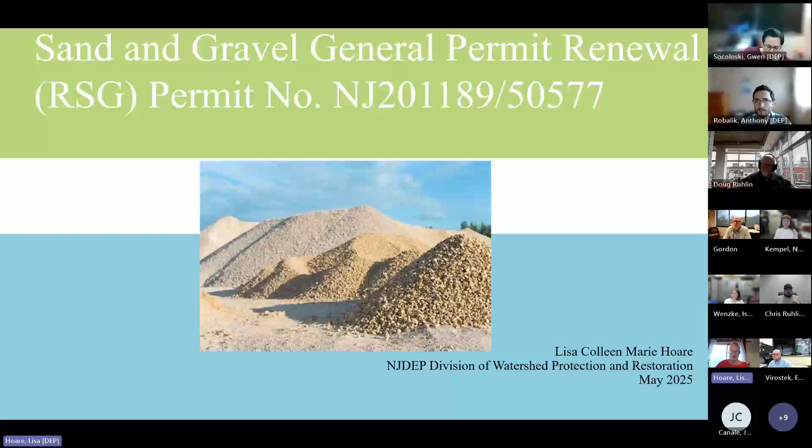Good morning, everyone. My name is Lisa Colleen Marie Hoare, and I work as an environmental specialist in the Industrial Stormwater Permitting Unit and the Bureau of New Jersey's Stormwater Permitting, Division of Watershed Protection and Restoration. This presentation is for the Sand and Gravel General Permit Renewal, or RSG Permit Renewal, that was recently pre-drafted. The presentation will highlight changes and updates that the department has deemed necessary for a comprehensive renewal of the permit. So let's get started.

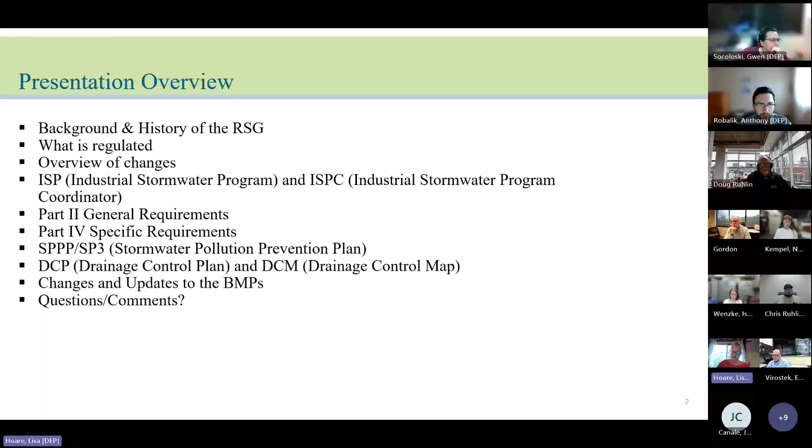Here's an overview of the presentation. This morning we'll start by briefly talking about federal background and history of the RSG permit, as well as what is regulated under the RSG. Then we'll look deeper into the changes and requirements and how it differs from the current expired 2014 Sand and Gravel GP. We'll have a question and answer period at the end of the presentation.

First, let's get into a brief background of the regulations from both the Clean Water Act and EPA and how it shaped our industrial programs in New Jersey. Under the Federal Water Pollution Control Act of 1972, a facility with a stormwater discharge associated with industrial activity must obtain a NPDES permit. However, EPA delegated the authority to implement the Federal Industrial Stormwater Program in New Jersey to the New Jersey Department of Environmental Protection. So the industrial stormwater permits are issued from us.

The precursor to the RSG was the R13, also known as the Mining and Quarrying GP. However, the RSG was created due to demand from facilities that only engage in sand and gravel operations. Additionally, facilities authorized under this permit do not discharge to surface water, so this permit does not contain any stormwater monitoring or limits. The first RSG master permit was issued in 2014 and is being renewed this year.

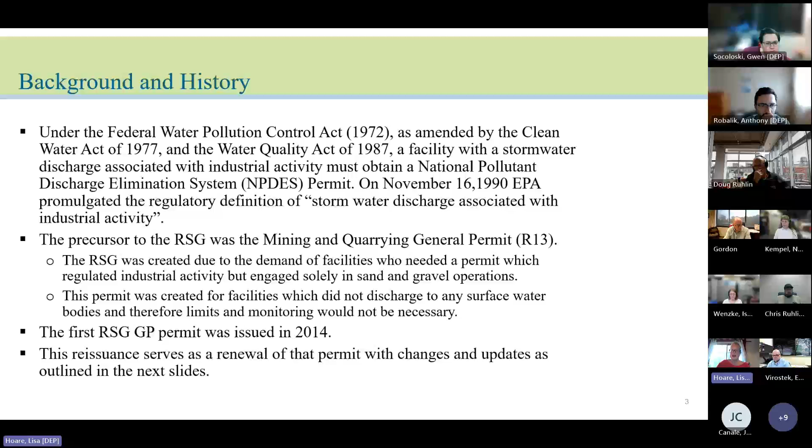The RSG is one of the industry-specific general permits that our program issues, and it regulates industry for sand and gravel production. Sand and gravel production involves removing and processing various grades of rock, turning the stone into different sizes and grades. The key essential element is simple: the processed water cannot be discharged to any surface water bodies.

As a result, we require various plans, including the SPPP and DCP, which we will discuss later, and implementing BMPs to manage the stormwater on site. As a result of these requirements and the limited industry regulated under this permit, limits and monitoring again are not required under this permit. Here are the SIC and NAICS codes regulated under this permit.

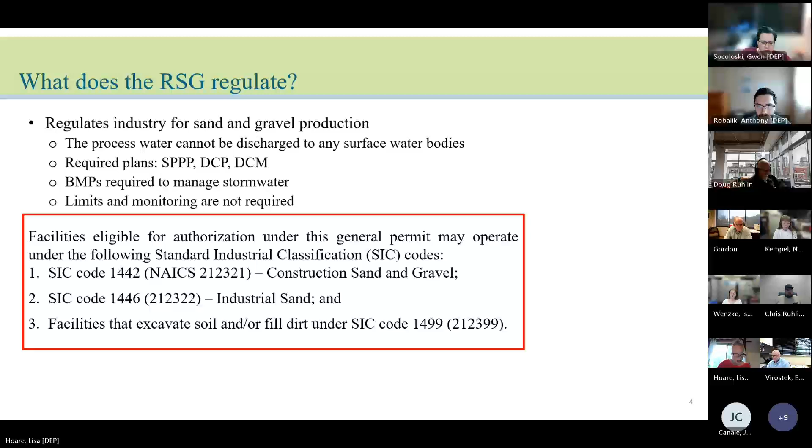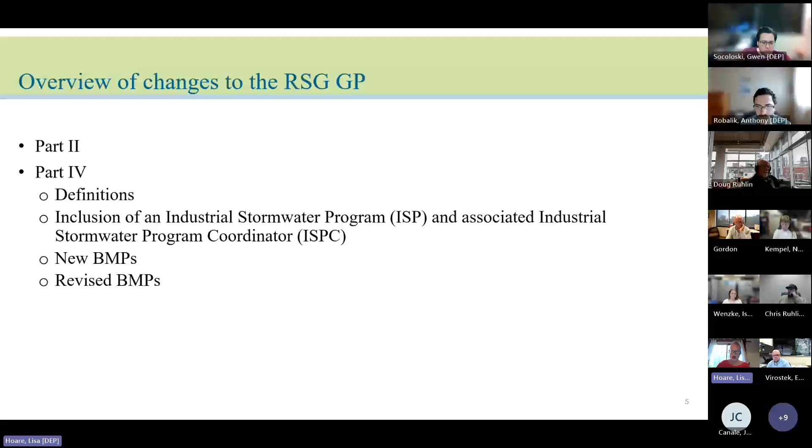Now we'll discuss the changes being introduced to Part 2 and Part 4 of the permit. I will go into each part individually over the next few slides so you're familiar with the proposed changes. Most of the changes occur in Part 4, as well as the BMPs therein.

Let's talk about some new requirements in Part 2 of the permit, which are general requirements. There are several new notifications and updated requirements that have been included. Electronic reporting and requirements for obtaining a 5G3 for new construction that isn't related to the sand and gravel activities have been reworded to be consistent with current requirements and other new general permits. Additionally, reworded requirements in Part 2 include notification for facility changes, notification of changes to the facility permit contacts, access to information, notifications of ownership and/or permittee operator entity, eligibility, authorization, and automatic renewal of the authorization.

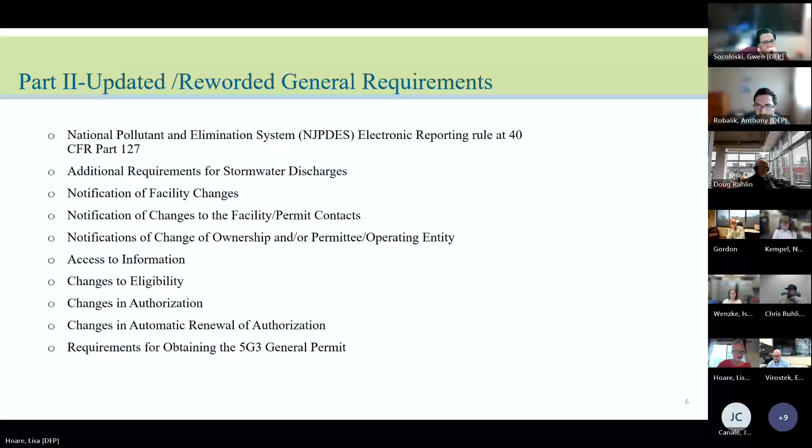First, let's discuss what's included in Part 4 of the permit. There are a couple of new definitions.

Authorized representative means those persons whose presence is in place of the actual entity, person, or department with all rights and responsibilities under NJAC 7:14A-1.2. Bulk liquid means a liquid stored in a fixed in place above ground storage tank, including but not limited to oil, petroleum products, processed wastewater, including leachate, and chemicals.

Next, we'll go over the terms that were included in the 2014 RSG permit but have updated definitions in the renewal. The definition of BMP has been expanded from the previous permit to include a schedule of activities, prohibition of practices, maintenance procedures, and other management practices to prevent or reduce pollution of waters to the state. Containerized source material and non-containerized source material has been updated from source materials, breaking them into two definitions.

Equipment and vehicle are now split into different separate definitions. Stormwater is defined as water resulting from precipitation, including rain or snow, that runs off the land surface, is transmitted to the subsurface, or is captured by the separate storm sewers or other sewage or drainage facilities.

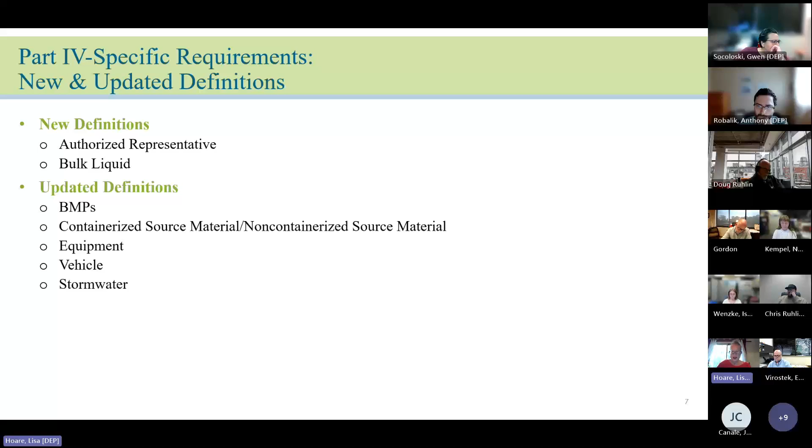There are also several definitions that were removed from the permit as they are no longer used in the updated requirements of the permit.

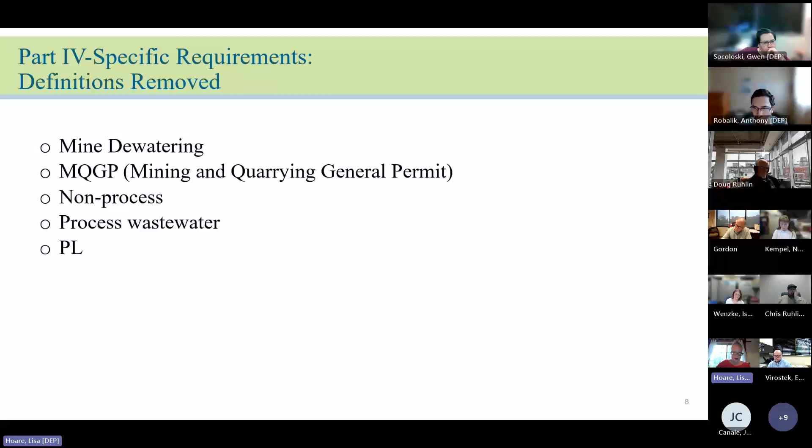So now we'll take a closer look at Part 4 narrative requirements. First, the establishment of an ISP and an ISPC.

The department is introducing new requirements for developing, updating, and implementing an industrial stormwater program, also known as an ISP. The objective of the program is to implement BMPs to reduce the discharge of pollutants. The ISP shall designate a responsible party for that program, known as the Industrial Stormwater Program Coordinator, or ISPC.

The role of the ISPC is to prepare and maintain a current and complete SPPP, as well as complete, sign, and submit the annual report, train employees and contractors on the site, and lastly, be the point of contact for the department.

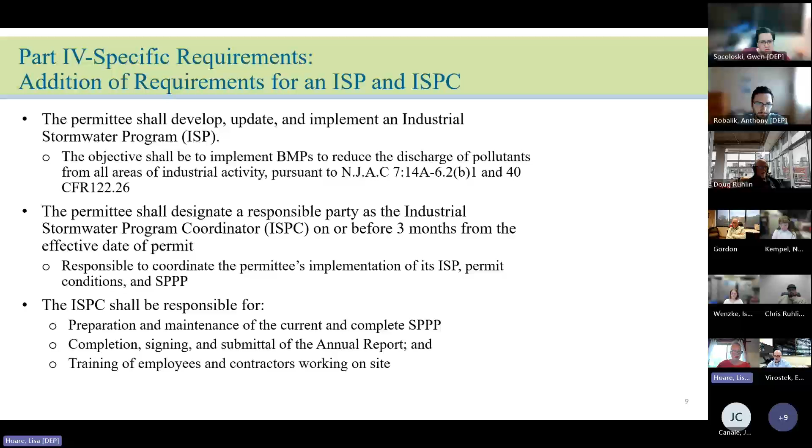Here are the remaining Part 4 requirements, which we will discuss over the next few slides. We have updated and expanded conditions for the SP3, or Stormwater Pollution Prevention Plan, the DCP, or Drainage Control Plan, and the DCM, also known as the Drainage Control Map. After that, we'll go over the updated BMPs included in Part 4.

To be clear, the permittee is already required to have an SP3 and DCP, including a map. These are updated requirements that need to be incorporated into the current SP3 and DCP.

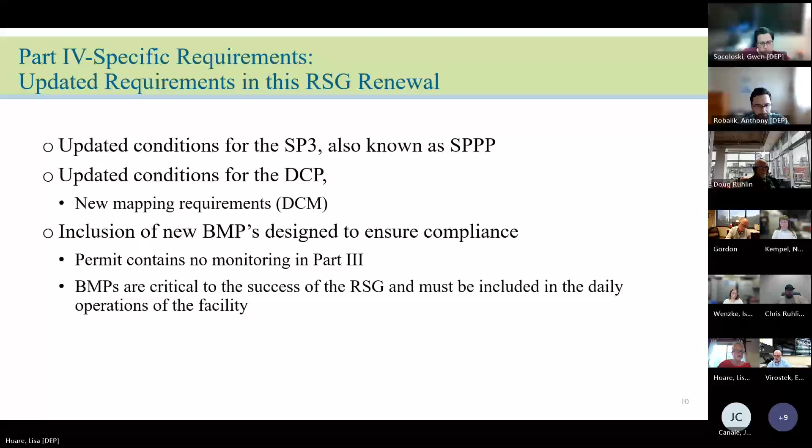Listed here on the slide are the SP3, or Stormwater Pollution Prevention Plan requirements. In the SP3, the permittee must describe the measures necessary for compliance with all permit conditions for all stormwater discharges associated with any source materials.

Inclusion of a current inventory of all source materials must be provided, in addition to thorough descriptions of all industrial activities occurring at the facility and their associated locations. The SP3 must include a drainage control plan and follow all record-keeping requirements.

Note: preparation and submission of the new and updated SP3 must be done within 6 months of the effective date of the permit and implemented within 12 months from department approval.

If there are deficiencies, the permittee must amend the SP3 within 60 days after receiving notification from the department. Lastly, the permittee shall review the SP3 at least once a year and update as often as necessary.

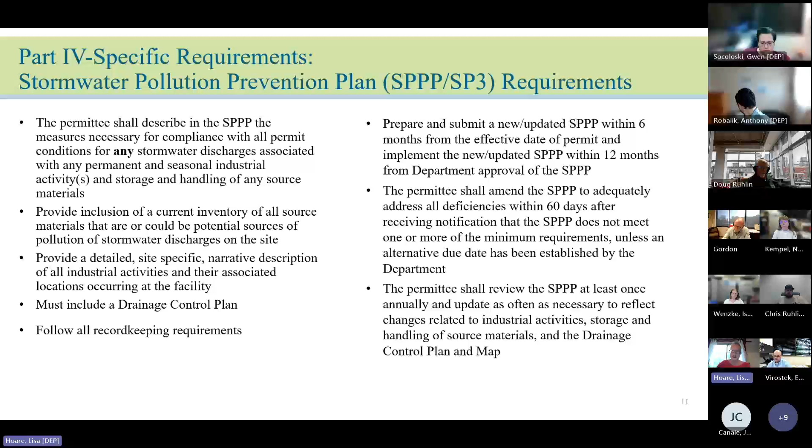Listed here on this slide are the Drainage Control and Drainage Control Plan, or DCP requirements. First, the permittee must establish and maintain drainage control at the facility to ensure that all stormwater associated with industrial activity remains on site and is prioritized to be used for dust control.

If structural practices are needed to achieve drainage control, the permittee shall design and implement structural stormwater management BMPs in accordance with either the New Jersey Stormwater Best Management Practices Manual or propose an alternate design approved by the department. However, all BMPs shall be designed to treat all industrial stormwater at the facility, not only the water quality design storm.

Also, the permittee shall ensure that discharges to borrow pits that have intersected the groundwater table shall only be for process area return water or incidental overland flow in the area around the borrow pits.

Lastly, for drainage control, the permittee shall prevent overland flow of industrial stormwater onto adjacent properties through the use of BMPs such as berms, basins, and site grading.

And all this information should be contained in the DCP. The DCP is made up of two parts: a drainage control map, DCM, which we will discuss on the next slide, and a written narrative section.

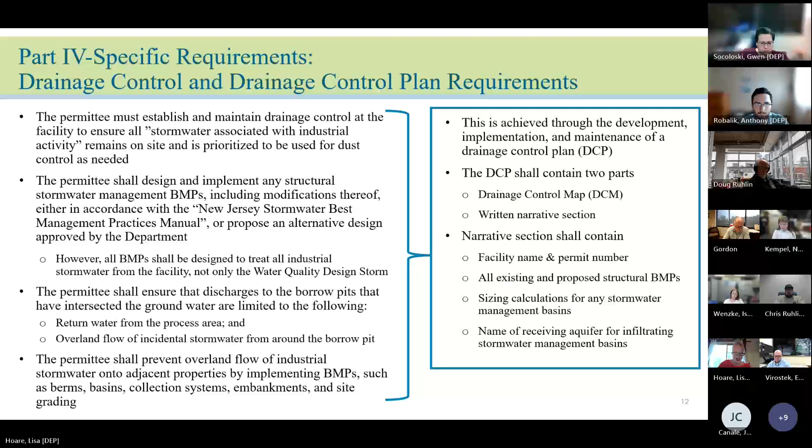Next, we'll take a closer look at the Drainage Control Map, DCM, which is part of the Drainage Control Plan. At a minimum, the DCM needs to include site boundaries, lot and block info, site topography and elevation, north directional arrow, boundary lines of each industrial activity area and source material area, current and proposed drainage area, grading with flow directions indicated, adjacent surface waters, receiving aquifers, existing structure locations such as buildings, roads, and parking, and finally any groundwater contamination, if present. The map should also indicate the dates for initial preparation, as well as any revisions.

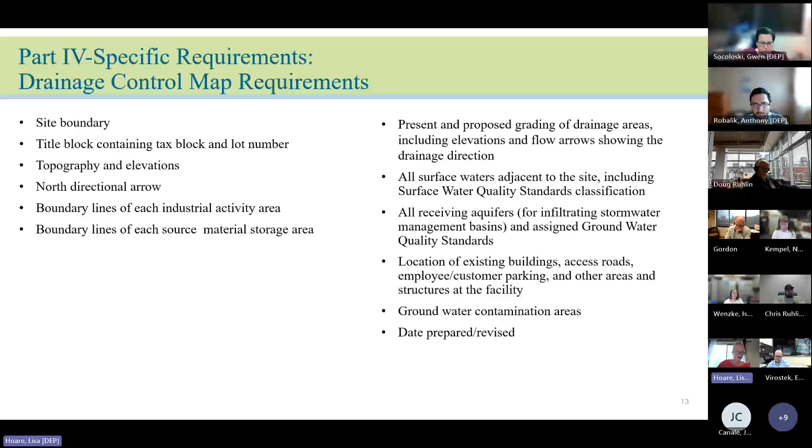Next, we'll move on to discussing the BMPs, or best management practices, that are included in Part 4 of the RSG permit. The 2014 RSG permit included only these first four BMPs shown here in Part 4C, which was for specific best management practices. These BMPs were primarily focused on storage of wood chips and tree debris, salt storage, sediment transport, dust control, and preventing the discharge of oil and grease.

There were additional BMPs for fueling, vehicle maintenance, spill response, and discharge of stormwater for secondary containment, included in Attachment A of the 2014 RSG.

Under the 2025 RSG, we removed Attachment A and listed all BMPs under Part 4D, along with renaming some of the BMPs that were included under the 2014 RSG permit. This was done to increase the clarity of the permit requirements and for alignment with language in our other permits. The department believes that the clarification of previously included BMPs and the addition of some of the new BMPs you see listed here will result in a more successful RSG implementation.

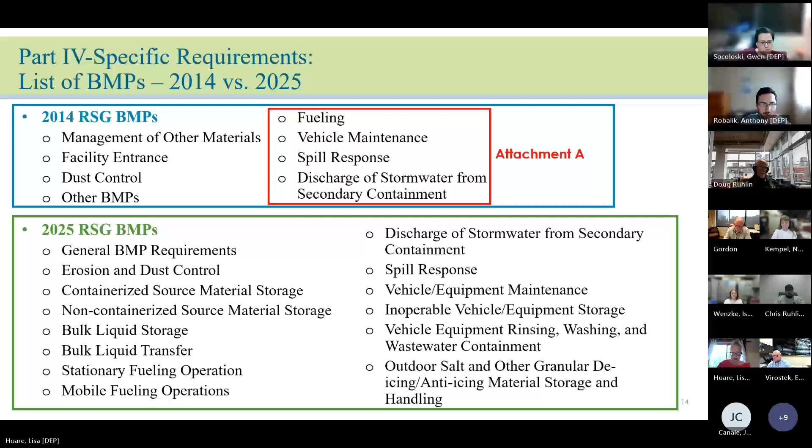So now we'll go into a little bit more depth on the BMPs included in Part 4D of the 2025 RSG renewal. On this slide and the following slides, each of the BMPs from Part 4 will be noted with some of the associated major requirements bulleted underneath. However, please refer to Part 4D of the permit for an extensive list of the requirements.

First, there are some general requirements. This is primarily concerned with how and where source material shall be stored, as well as other general stormwater discharge requirements. Next, erosion and dust control establishes BMPs for site stabilization and dust control, such as traffic control in non-stabilized areas, entrance and exit stabilization, and reuse of collected stormwater to minimize dust and sediment transport. The requirement to sweep or clean impervious areas as frequently as necessary is also included on the erosion and dust control BMP.

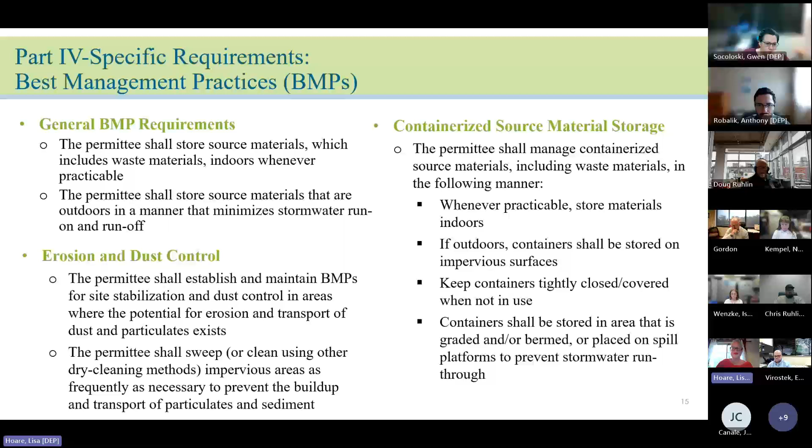First BMP on this slide is for non-containerized source material storage. This BMP is especially important as the possibility of pollutant transport by stormwater for non-containerized source material is higher than that for containerized source material. This BMP requires the source material to be stored indoors whenever practicable, and if stored outdoors, to minimize stormwater runoff by using three-sided bays, surface grading, or berms. There is also a requirement for the permittee not to store waste materials for a period longer than 6 months unless authorized by the Division of Sustainable Waste Management.

The next BMP is for bulk liquid storage. When storing bulk liquids, which includes storage in a fixed in place above ground storage tank of things like oil, petroleum products, and processed wastewaters, there must be a secondary containment area. The containment area shall be impervious and be able to contain at least 110% of the largest tank's capacity within the area. Next, when transferring bulk liquids, the permittee shall establish, maintain, and implement standard operating procedures in the SPPP to prevent exposure to stormwater during transfers.

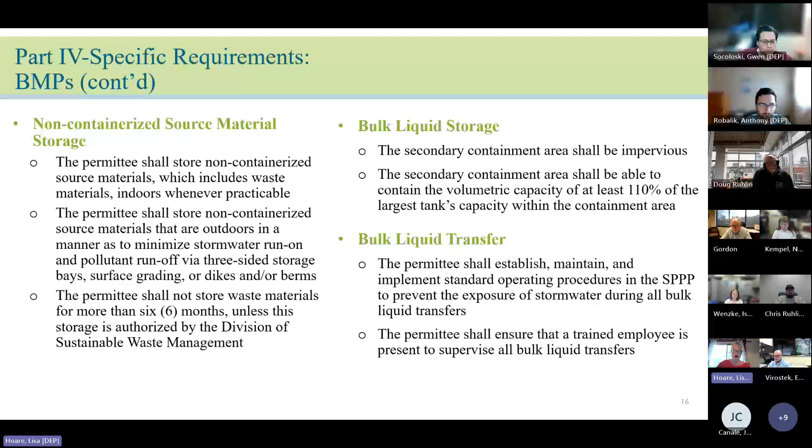This shall include blocking stormwater inlets within the drainage area of the transfer operation, placing temporary berms or booms around the transfer operation, as well as placing drip pans under all hose and pipe connections. Additionally, a trained employee must be present to supervise all bulk liquid transfers.

On this slide, we'll be discussing BMPs for stationary fueling operations. First, the permittee shall establish, maintain, and implement standard operating procedures in the SPPP to prevent the exposure of stormwater during stationary fueling operations and ensure that all employees who perform stationary fueling operations are properly trained. The permittee shall ensure that all stationary fueling operations are conducted on an impervious surface and under cover. All stormwater that comes in contact with stationary fueling operations shall be directed to an oil water separator.

There shall be a dedicated and fully stocked spill kit within each fueling area, as well as signage posting detailing safe operation of fueling equipment. Lastly, the permittee shall conduct routine inspection and maintenance of all fueling equipment, including associated piping and pumps. The goal is to prevent the exposure of stormwater during all stationary operations.

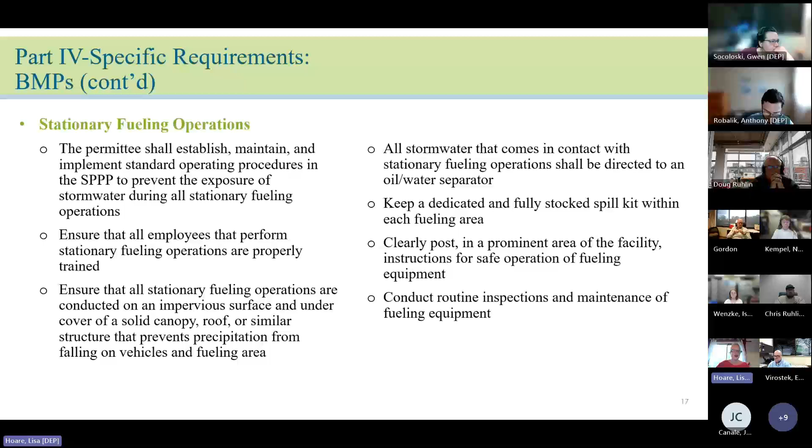Next, we will discuss BMPs for mobile fueling operations. Similar to stationary fueling, the permittee shall establish, maintain, and implement standard operating procedures in the SPPP to prevent exposure of stormwater during mobile fueling operations, and ensure all employees that perform mobile fueling operations are properly trained.

The permittee shall manage all mobile fueling by blocking any storm sewer inlets within the drainage area of the mobile fueling operations, as well as placing temporary barriers around the operation to contain the area. Absorbent pads shall be placed under each hose connection, and mobile fueling should not occur within 50 feet of any storm drain or surface water body, including any borrow pits that may have intersected the groundwater table.

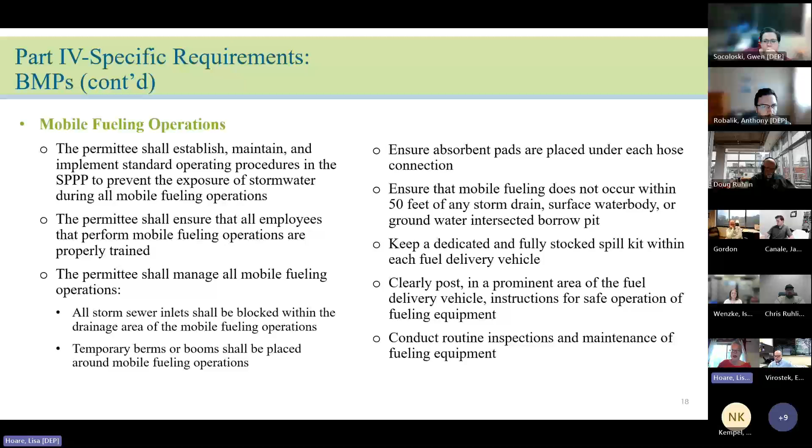Again, similar to stationary fueling, there shall be a dedicated and fully stocked spill kit on hand within each fuel delivery vehicle, as well as signage posted on the vehicle detailing safe operation of fueling equipment. Lastly, the permittee shall conduct routine inspections and maintenance of all fueling equipment.

Next, the BMP is for discharge of stormwater from secondary containment. This could be areas of secondary containment around fuel storage, or de-icing or brine solution as an example. The important thing is that discharge of accumulated stormwater from these areas is only allowed after a visual inspection has been conducted to ensure that bulk liquids have not contaminated the stormwater.

If the pollutants are not able to be seen in stormwater from a visual inspection, such as for a brine solution, there shall be a determination based on recent tank inspection and bulk liquid transfer that the stormwater is clean and does not contain any of the tank contents. If a determination cannot be made, the stormwater shall be disposed of properly as process wastewater. Additionally, valves to the secondary containment area shall always remain closed except when discharging stormwater.

Next is spill response. BMPs shall be developed by the permittee to immediately address any leaks, spills, and other releases that have the potential to be exposed to stormwater. To manage a spill that has occurred, the spill should be contained through the use of temporary berms or booms, and all storm sewer inlets within the drainage area of the spill should be blocked from allowing runoff to enter.

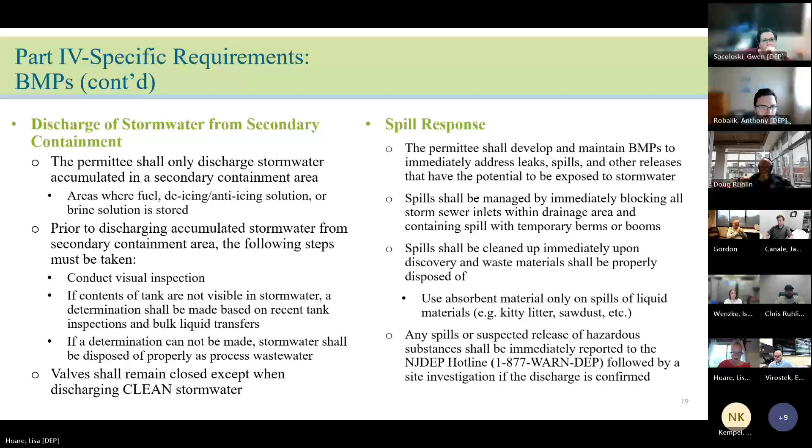Next is vehicle equipment maintenance. The permittee must first and foremost properly operate and maintain all vehicles and equipment to prevent the exposure of pollutants to stormwater. During maintenance of vehicles and equipment, discharge of oil, grease, thinners, degreasers, lubricants, and contact cooling water to groundwater or surface water must be prevented.

Maintenance shall be conducted indoors whenever practicable and on an impervious surface. If maintenance is conducted outdoors, it must be conducted in a designated contained area and performed on an impervious surface. Additionally, for outdoor maintenance, portable tents or covers must be placed over vehicles and equipment that is being serviced overnight and when not being worked on.

A dedicated spill kit must be kept within the maintenance area. Drip pans must be used to capture any fluid leaks, and any stormwater captured within the maintenance area shall be disposed of as process wastewater.

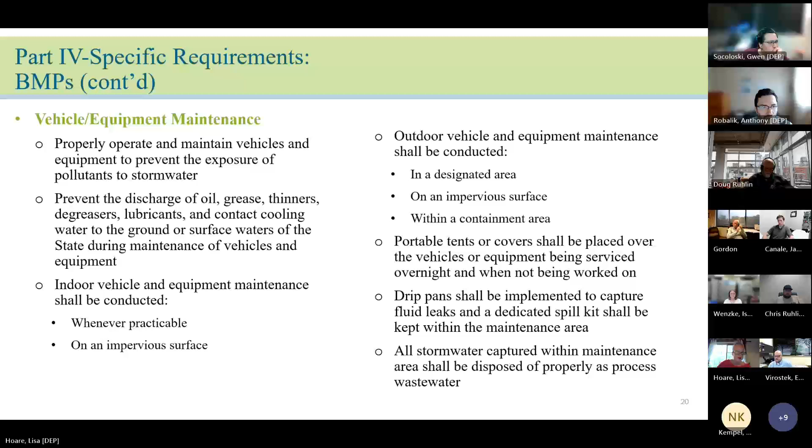Next, we will go over BMPs for inoperable vehicle and equipment storage. Inoperable vehicles and equipment shall be stored within a designated area at least 50 feet from any storm drain, surface water, or borrow pits that intersect the groundwater table, and they should be covered if there is exposure of internal components or rust damage.

Leaking of fluids from an inoperable vehicle shall be prevented by repairing the leak and/or draining the fluids from the vehicle or equipment. If an inoperable vehicle or piece of equipment is discovered to be leaking, drip pans shall be implemented to immediately contain the leak. If the inoperable vehicle or equipment contains any batteries, there are certain requirements for them.

Batteries shall be stored indoors. If the battery cannot be stored indoors, it shall be stored under cover and on an impervious surface. And if a battery is cracked, broken, or leaking fluid, it should be disposed of immediately and properly.

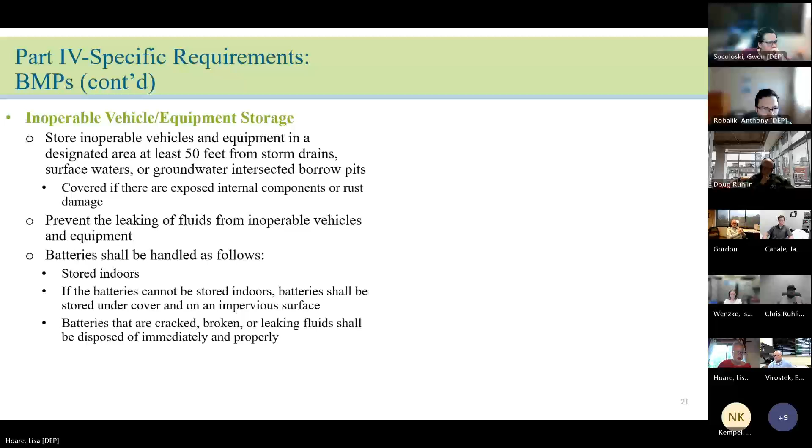Next is vehicle equipment rinsing, washing, and wastewater containment. For vehicle equipment rinsing, the use of detergents is prohibited. Rinsing is limited to removal of grit, grime, dust, dirt, and incidental road salt on external parts and undercarriages only. Prior to rinsing, bulk residue shall be removed to the maximum extent practicable using dry cleaning methods such as shoveling or sweeping. Additionally, a vehicle or piece of equipment shall not be rinsed if it was used to move or excavate hazardous or contaminated materials.

For vehicle and equipment washing, which is not limited to using water only, the discharge of wastewater shall be prevented from discharging to any surface or groundwater. Washing shall be performed indoors whenever practicable, and wastewater shall be discharged to a sanitary sewer if available. If a sanitary sewer is not available, washing shall occur in a designated wastewater containment area on an impervious surface. The area shall be sectioned off with the use of booms or equivalent measures to prevent the discharge of wastewaters into surface waters, groundwaters, or stormwater sewer systems.

There are several requirements associated with the wastewater containment structure, including testing, inspection, and procedural requirements. Please refer to Part 4D 13D of the permit for full details.

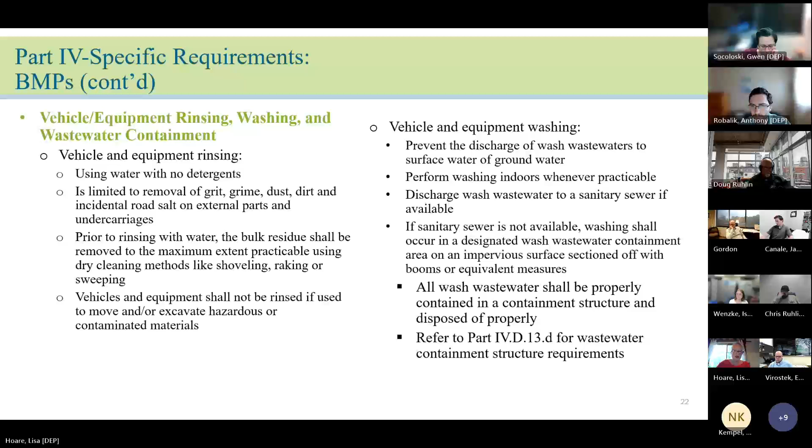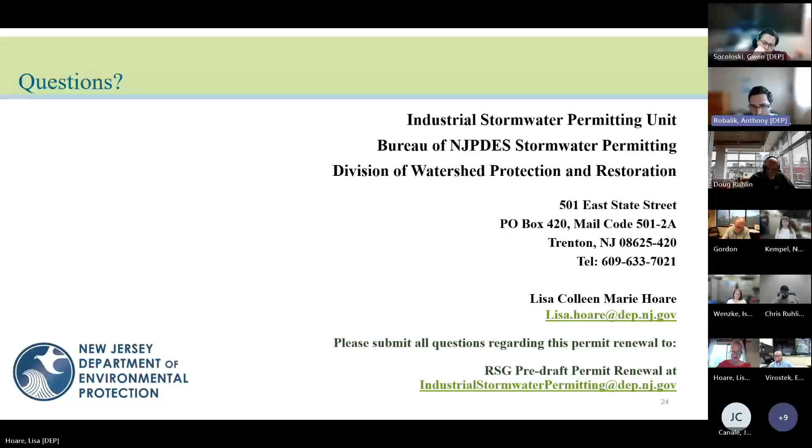Something I wanted to add before we move on is please note that we issued the pre-draft permit on May 6th and requested that any comments or factual corrections be brought to our attention within 30 days of that date, so by June 5th. That should allow us enough time to review those and hopefully issue the draft permit and fact sheet by the end of the spring or very early summer.

Also, we ask that when you send us questions or comments, please be as specific as possible about the permit condition or conditions to which you're referring. And if those comments are on the pre-draft permit, we will consider those when issuing the formal draft permit. So with that, we can open the floor to anyone that has any questions or comments now.